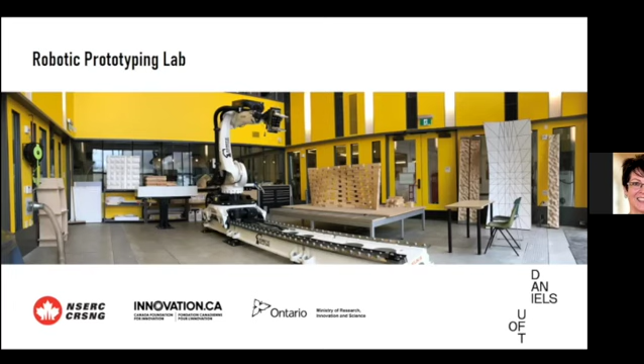So this is where I work normally in non-pandemic times. This is the John H. Daniels Faculty of Architecture, Landscape, and Design. We moved into this building actually relatively recently in 2017. The building was originally built in 1875 as the home of Knox College. You can see the original building in front, and in the back is the new addition. In that new addition, I also have my lab. So this is the robotic prototyping lab where I do some of my research.

My research, while it encompasses digital fabrication, robotics, and construction, right now is really primarily at the intersection of sound and architecture. We'll see some more evidence of that with some of the projects I'm going to show. I did my PhD research in Copenhagen, at the Royal Danish Academy of Fine Arts, an arts institute, but I worked at the Center for Information Technology and Architecture, a highly digital and technical group. Prior to that, I was an associate partner with the research and development group of the major international architecture practice, Foster & Partners.

While at Foster & Partners, I had the good fortune of not only working with some amazingly talented people, but also working on projects that actually got built. So this is the Kogod Courtyard in Washington, DC, Lime Street Office Tower in London, and the Thomas Deacon Academy in Peterborough in the UK.

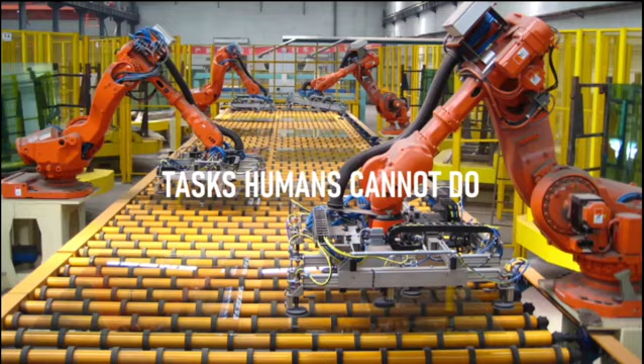So the topic of my talk today is about robots, and you've probably come here to hear about robots. So what about robots? It's an oft-quoted explanation and/or excuse for the adoption of robotics that they will do tasks that are dull, dirty, and dangerous. This certainly presents some noble seeming reasoning. Robots can replace human workers in jobs that could be harmful to human health, thereby moving human jobs to safer, cleaner, and more interesting work. Robots can do tasks that humans cannot do or cannot do easily — for instance, picking up these large panes of float glass.

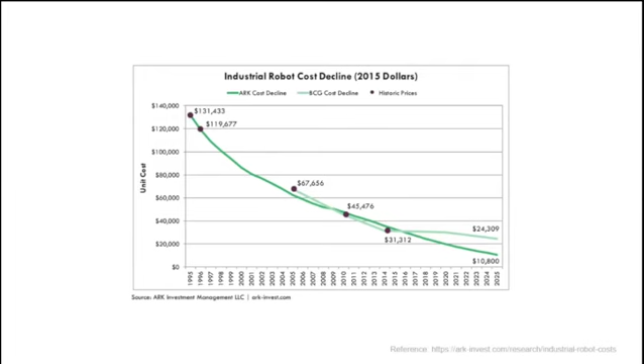Worldwide, the cost of robots is going down and the number of robots is increasing. With $26.9 billion in global shipments in 2015, this is expected to increase to $67.9 billion in 2025. So the benefits of robots are many. They can do repetitive tasks, they don't get tired, they can work 24 hours a day, they're strong, they're fast, they're precise, they're not concerned with danger, they create new markets and value networks, and they're inexpensive, relatively, and widely available. So, what about the building industry?

Where are the robots? It is certainly not for a lack of dull, dirty, and dangerous jobs. Construction has lagged behind other sectors in the adoption of robotic technology.

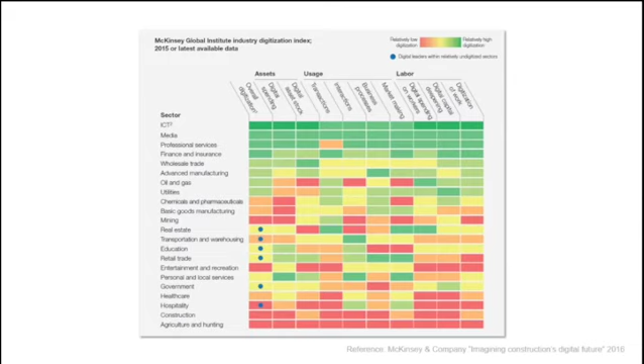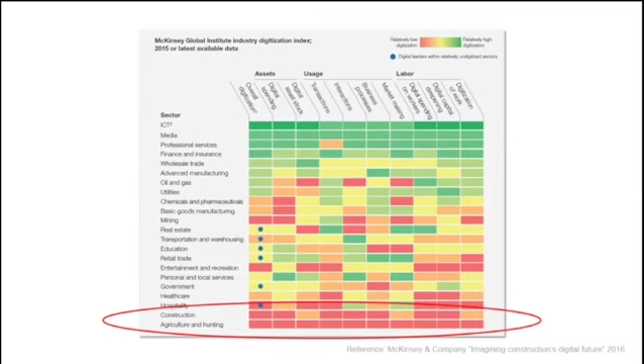In 2016, McKinsey Global Institute studied the use of digital technology in a variety of industry sectors, and unfortunately, construction did not rank very highly. In fact, the amount of digitization in construction rates right above agriculture and hunting, right at the bottom. Additionally, we can see that labor productivity in construction has not kept pace with the general productivity increases when compared to the labor market as a whole.

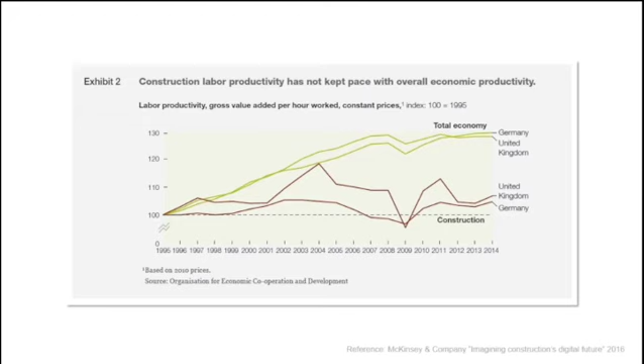So we can see that there's room for improvement here. Robots certainly mean the adoption of more digital practices, and this could therefore also mean potentially an increase in productivity. But what about architecture?

While related to construction and the production of buildings, architecture is fundamentally concerned with design. And so what do robots have to do with architecture?

The definition of what it means to be an architect is linked to our design tools. As Jonathan Hill has pointed out, it was the invention of drawing that enabled the creation of the architect. The architect is defined by the ability to draw, and the drawing to conceive of and communicate the plans for a building at a remove, both spatially and temporally, from the construction site. And this has been the way for 1,000 years or more.

I would argue that it is no small matter that the design tools of the architect have changed. And it also makes sense of the reluctance of the architect to adopt entirely new tools, as their whole definition of their discipline is based on this, right?

Ivan Sutherland introduced the world to the first CAD system in 1963, Sketchpad. This system could draw, it had parametric capabilities, it could do simulations and calculate structural performance, it could link geometric designs to numeric databases. Ivan Sutherland recognized that the computer offers considerable potentials that are different and greater than the drafting board. Using computation was not just another way to draw, but a new way of thinking.

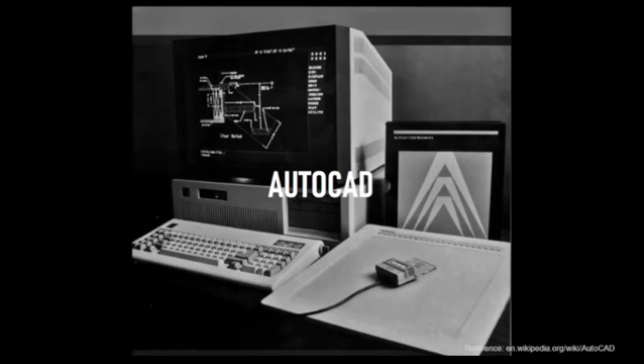AutoCAD version 1 was released in 1982, and by 1986, AutoCAD had become the world's best-selling CAD software. However, the potentials that Ivan Sutherland had identified had not been realized, as AutoCAD was essentially just a two-dimensional drafting board. Robert Aish writes that in retrospect, 2D drafting is really a travesty of Sutherland's original intentions, and the spectacular flaw of 2D drafting is that it fails to harness the potentials of the computer as a creative design tool.

In 2001, I finished my master's in architecture degree and moved to London, England from Canada to find work and begin my career as an architect. I ended up getting a job at an engineering firm, Buro Happold, one of the world's leading structural engineering firms, working for the Structures Group in London.

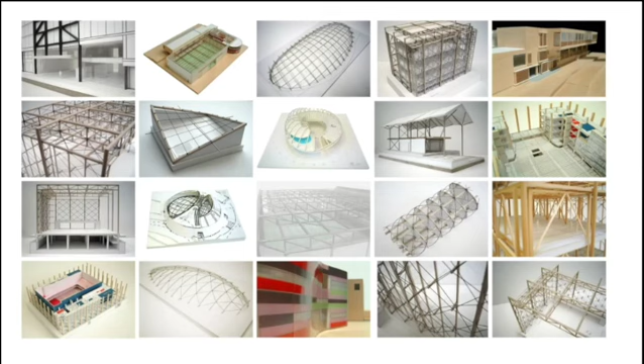Here I had the chance to work as a physical model maker, building a whole range of different types of physical models and doing a whole range of different types of drawings as well, in service of both the making of those models, but also communicating engineering concepts and performance concepts to the clients, which in this case were architects.

In the course of doing this, I also began to use digital technology more and more. At first to build better physical models, but eventually this just overtook what I did, and all the models that I built eventually became done in the computer.

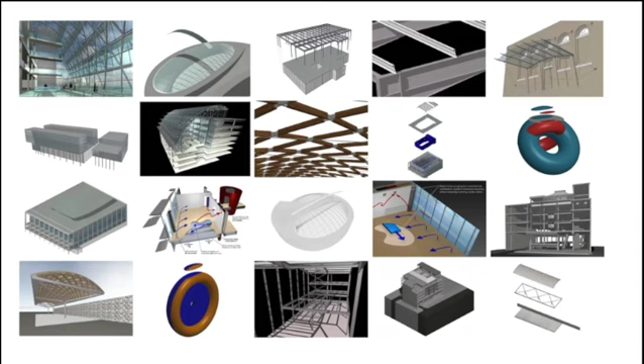So what I did was basically take this radial section through it, bring it down to the ground, and create these structural sections around this more amorphous form to create this physical model. So this move from the digital to the physical. However, as the design developed and as iterations happened, it became very hard to keep up with this. So I figured there had to be a better way, right?

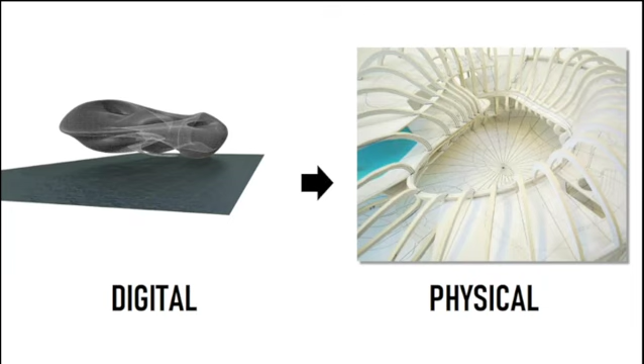That would automatically update our design intentions to describe these designs in terms of relationships, rather than having to remodel this geometry over and over again.

Around 2003, I attended the first Smart Geometry conference in Cambridge and had the opportunity to see Hugh Whitehead speak. If you recall the first slide I showed with the London skyline, the Swiss Re office tower, locally known as the Gherkin, features prominently. This building was going up at the time I was living there and working at Buro Happold.

This building was obviously very important to my experience of London. Seeing Hugh present on this project was important enough, but then for him to also explain this new design tool he was creating at Foster & Partners, able to explore the design potentials of this project as well as automate tasks like updating drawings, was really the answer I was looking for in terms of my own practice.

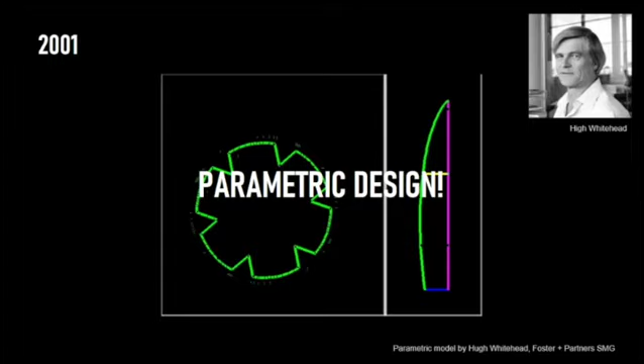So I thought, I have to go work for this guy. At that point I made contact with Foster & Partners, and I was fortunate enough to move from Buro Happold to Foster & Partners and join Hugh Whitehead and his team in the research and development part of Foster & Partners.

You can see here on the animation, the parametric model and the creation of these automatic floor plates. This was the state of the art at the time in architectural digital technology. This was the first project I worked on, which was a second stage competition for this large 1.5 km long canopy.

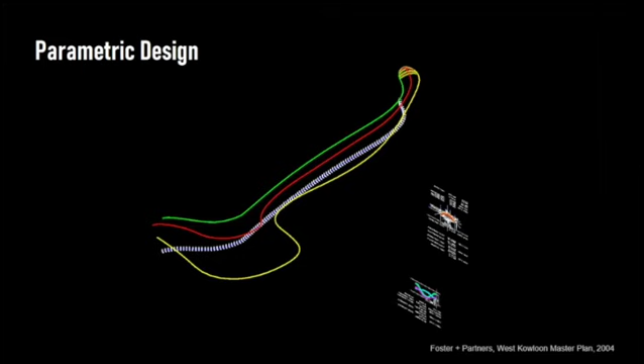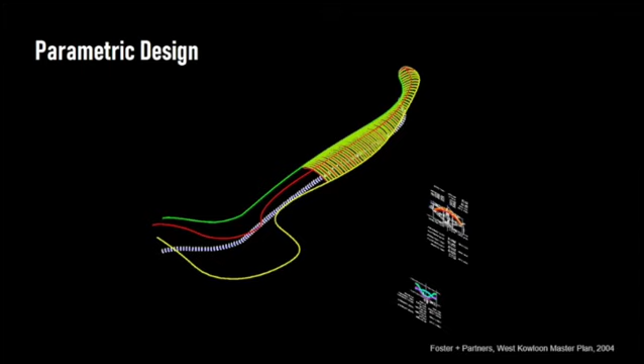I adopted these tools that Hugh was developing with Francis Aish. You can see here the parametric model and how I was placing these parametric sections, which were then creating the top and bottom surfaces for this giant roof.

But the problem was, once you broke it down to the actual elements we wanted to create, there ended up being hundreds of thousands of elements. The problem was that the parametric system didn't scale. So how were we going to scale up this parametric system? We needed to invent some new tools—again, inventing more digital tools for this project. This is where I found computer programming, i.e. scripting, which enabled me to create the huge amounts of elements that were necessary for this.

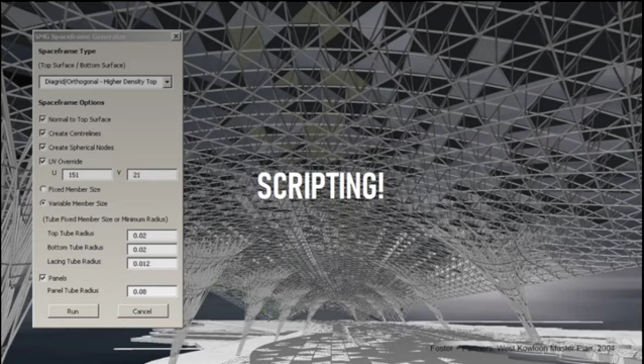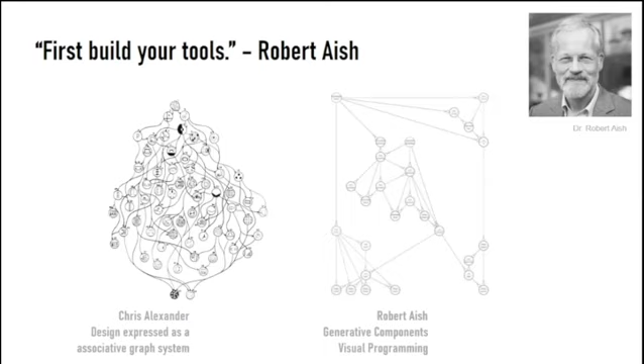Robert adopted a lot of ideas, not only from practice from people like Hugh Whitehead, but also from a legacy of computational thinkers such as Christopher Alexander, who had imagined design as an associative system using formal graph methods. Robert basically turned these ideas into software, so using visual programming through connecting design concepts, one can actually come up with architecture.

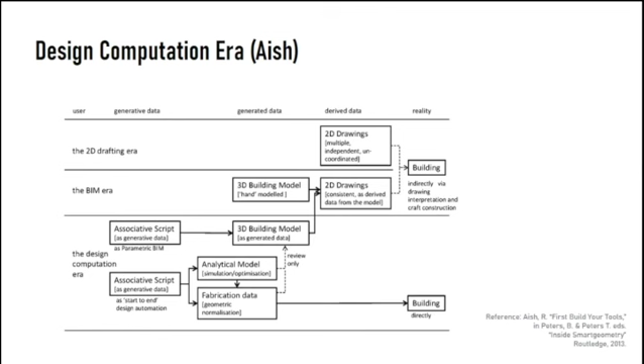Therefore, trying to enable some of these ideas that Ivan Sutherland introduced with Sketchpad, that CAD is not a better way to draw, but a deeper way to think. Robert likes to think that we're entering into this design computation era—or maybe this is wishful thinking—where the designer is no longer directly modeling the building. Instead, he's developing an algorithm whose execution then generates the building.

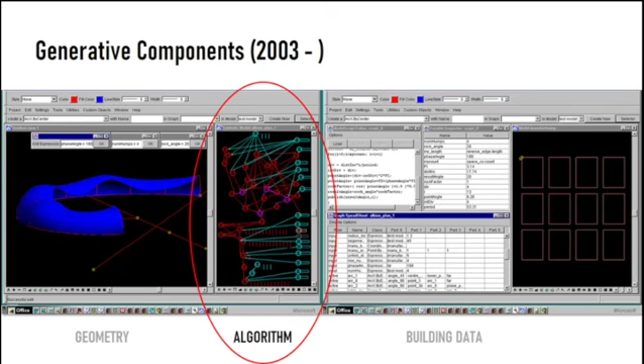So this is the software we were working with at the time, along with other softwares as well—Generative Components, where there's an algorithm expressed as a graph, which can produce both the geometry of the building as well as a variety of different building data. There were two different approaches we were using: associative modeling and computer programming and scripting, and Generative Components actually had both.

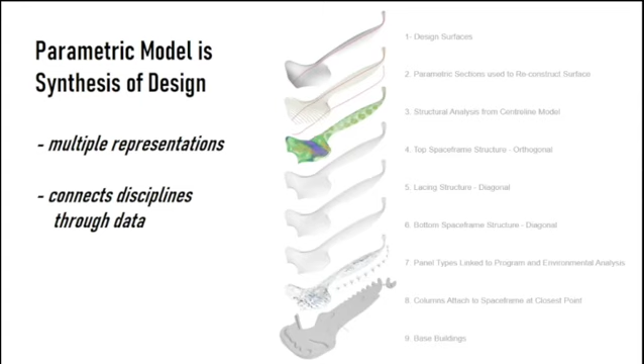What we were finding in these projects is that the parametric model was not only adjustable and able to create really cool forms, but it enabled multiple representations of data. What do I mean by that? It's not just the architectural drawing, but we could also include things like cost, structural performance, or environmental performance. We were able to connect different disciplines through this data we were developing.

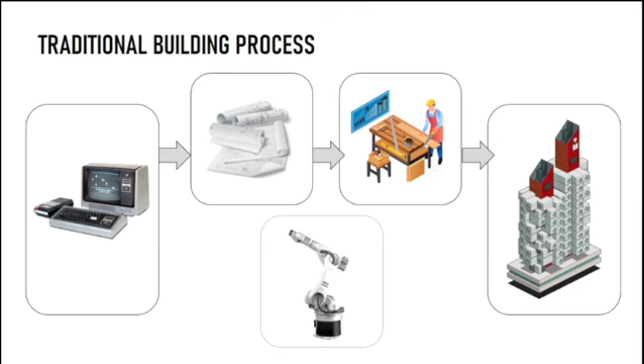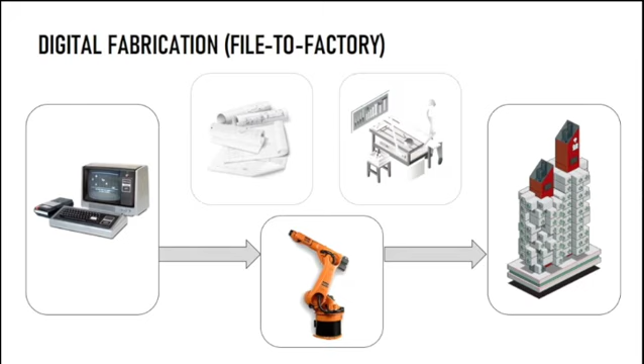So with this data, we began to experiment with digital fabrication. In the traditional building process, we go from the drawing on the computer to the production of physical drawings, which are then given to the craftsman who builds the building. With digital fabrication, we can go directly from the computer to create digital instructions which will then create the building. This is a cool idea, especially for those of us working with digital technology and architecture, so we were very quick to adopt this technology.

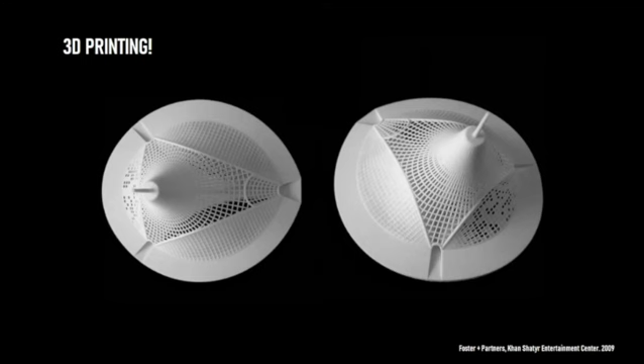We had the first 3D printer in a UK architecture office, which was one of the first projects I worked on. We were looking at complex, form-found geometries, and I was able to instantly 3D print these options, which was amazing. We were able to produce hundreds of different iterations, not hundreds daily, but certainly multiple iterations daily. This became a really key part of this project's development.

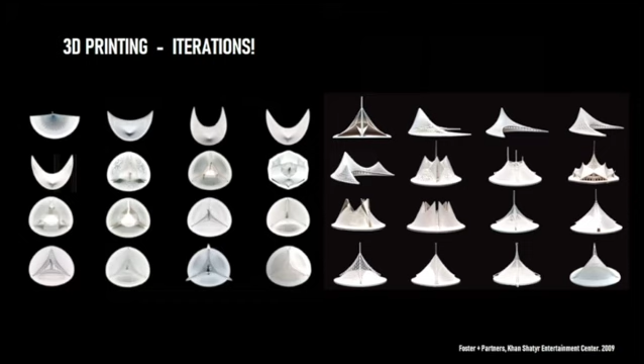As Hugh Whitehead said, the use of rapid prototyping closes the loop in a digital design process, and it's a recognition that key design decisions are still made from the study of physical models. This building here is the built project - the Khan Shatyr Entertainment Center in Kazakhstan.

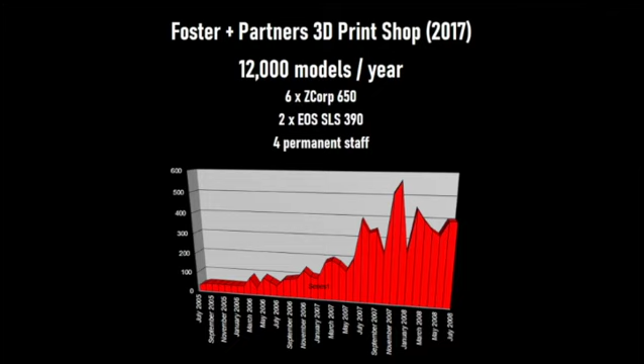So what we found is that from 2005, when we got the first 3D printer, 12 years later the Foster and Partners print shop is producing 12,000 models a year - a huge number of 3D prints. So massively successful at that particular architecture firm.

Why is 3D printing so successful? Architects were already working in 3D, so they already have the data - it doesn't require much more work to get it, okay maybe a bit more work. It's faster than hand building. And the cost - even though it costs a lot to 3D print, it costs more to pay an architectural assistant to build that model by hand. Also, the limitations of construction disappear, which arguably could be a good or a bad thing.

In smart geometry, we also noticed this shift from software development to fabrication. The first 6 years of smart geometry were really focused on developing parametric tools, computational tools for architecture, which didn't really exist for architects at the time. There were tools for engineers and mechanical design, but not really for architecture. So the first 6 years were developing these tools. Once the tools had been developed, it was like, what can we do with them? And digital fabrication became a key part of that.

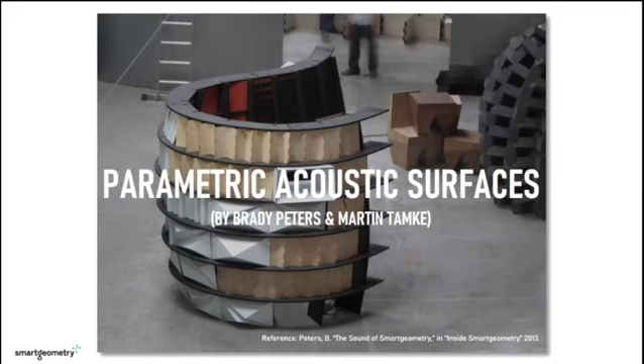This is the smart geometry workshop in Copenhagen, Denmark, where a lot of this research happened. I worked on a project there called Parametric Acoustic Surfaces, where we used digital fabrication - laser cutters, CNC machines, etc. - to create this performance-driven acoustic architecture.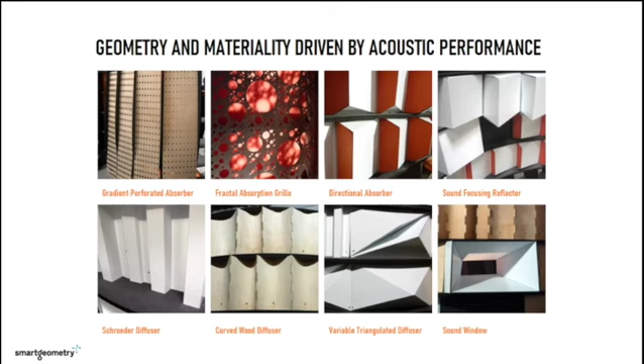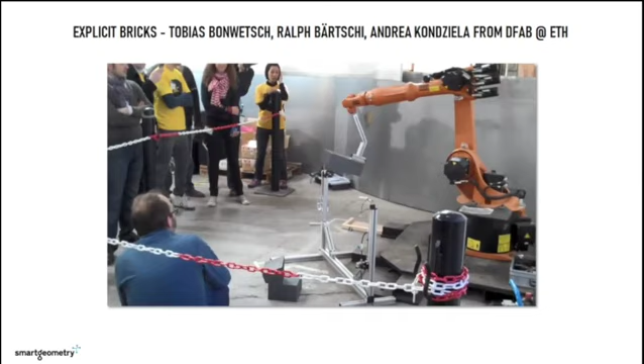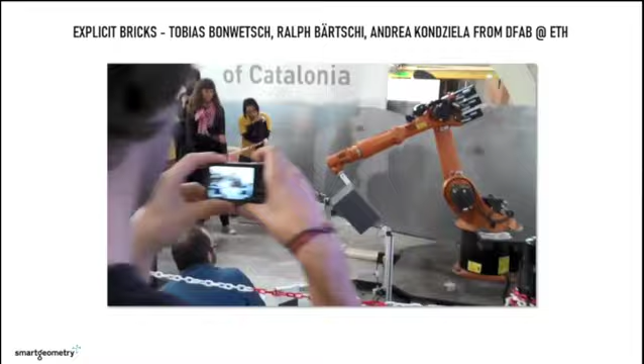But what I want to talk about is this project done by Tobias Bonwetsch and Ralph Bärtschi, particularly from the DFAB group run by Gramazio and Kohler at ETH Zurich. They ran a workshop called Explicit Bricks, where they brought a robot to the workshop. Through programming subtractive geometric processes using a hot wire cutter, they were able to create these bespoke formed bricks, which could then be stacked in very interesting ways.

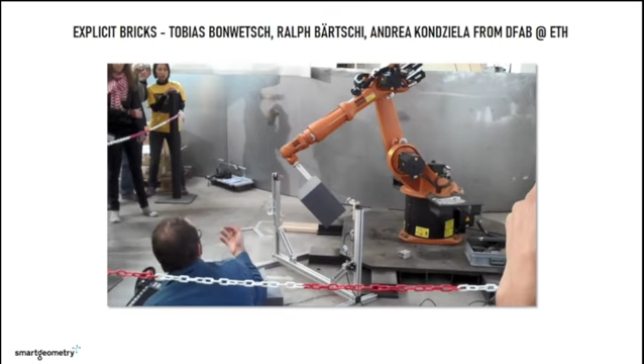This really was very revolutionary to us as architects, especially coming from 3D printing, which we weren't imagining would scale well to architecture. But we were thinking, wow, this is something that could scale to actually create real buildings.

Again, similarly to before, we have the algorithm which can create this digital model, but it can also directly send the fabrication instructions to the robot. Gramazio and Kohler had achieved success using this approach at the time, and they should really be credited with this initial research into robots in architecture, investigating the potential of this technology for application in architecture.

Traditionally, the promise of industrial robots has been that they would replace the human workforce. But these projects, led by the Swiss Federal Institute of Technology in Zurich, demonstrate a different result. Architects are free to create designs and patterns of a precision that simply could not be achieved by hand.

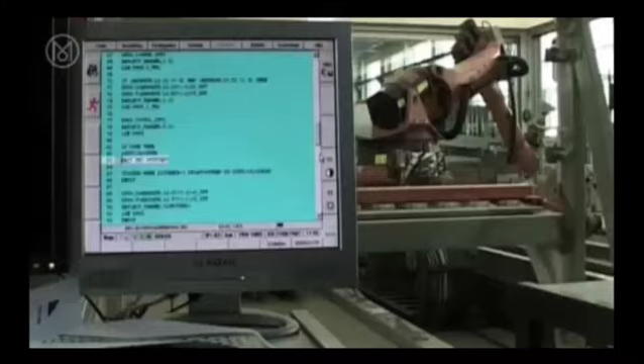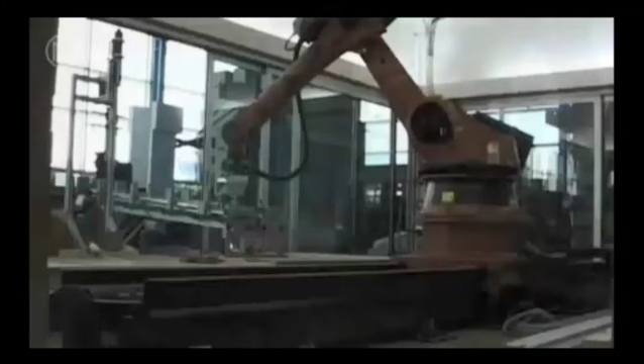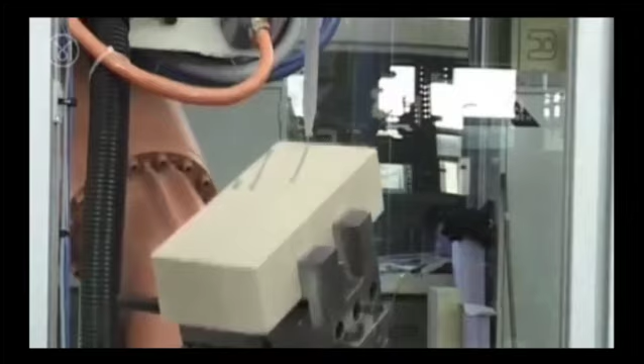The industry is very interested, but you have to show them that they will have the possibility to address the market with new products that didn't exist, and that they wouldn't have if they wouldn't invest in innovation. This is the point, the whole point. And I think every part of the construction industry could engage in such a process. Now we started with brick industry. What will happen if all buildings will be done by robots to the labor in construction industry? And we had a lot of success because of our products, prototypes we are doing right now, to show to people that have this question that it's not about the substitution of labor, it's about new products.

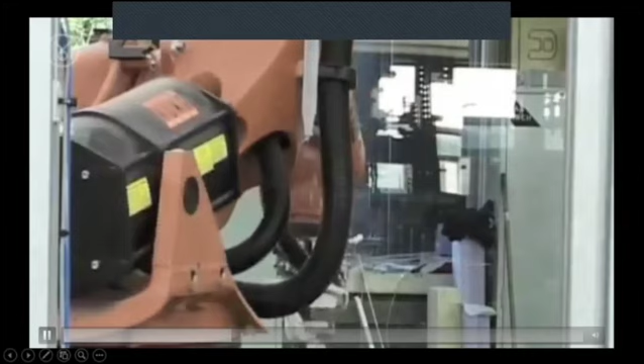So we are not doing the same thing just with robots. There are a lot of works, of jobs, of things that are very, very difficult for robots to do, and we will never automate. A human is much more efficient with his intelligence and so on. And there are other things you can do with robots. You can do very well with robots, with machines, and those processes generate new products.

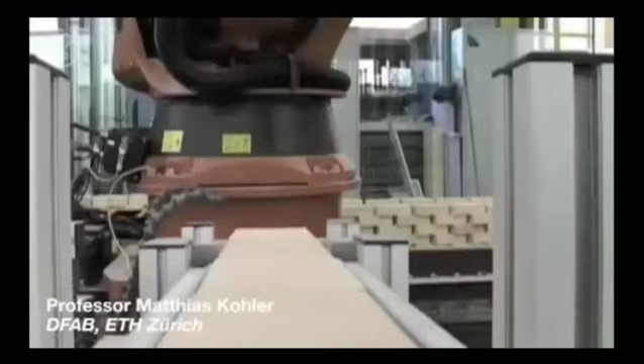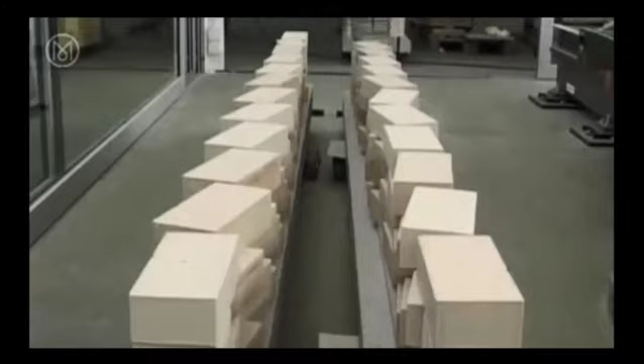The construction industry is very open to these changes because they see that from the architect's side of view that the demand for customization is constantly growing. Yet their possibility to react to this is currently very low because with the standard techniques there's a lot of development always to be done.

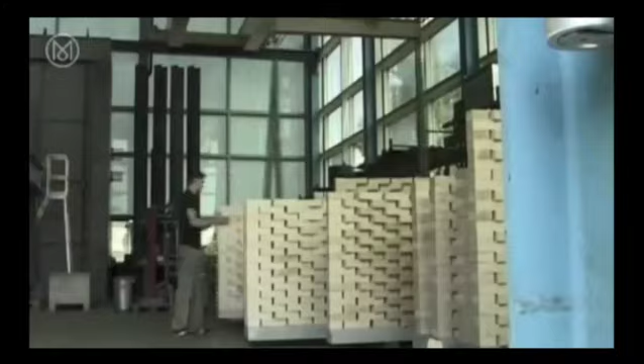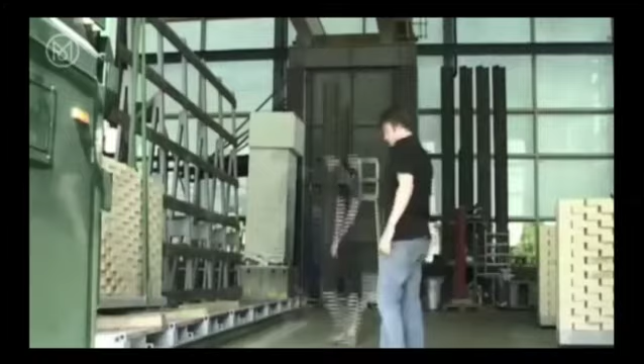Now with flexible manufacturing and digital fabrication, there's the possibility to standardize new products which are in fact mass customizable. You could imagine that products are no longer conceived just as fixed products which are then repetitively used, but that they are more complex, they have more capabilities and functionalities integrated into them, which are then custom produced by possibly small manufacturers, which can integrate all this information into a building part or an architecture.

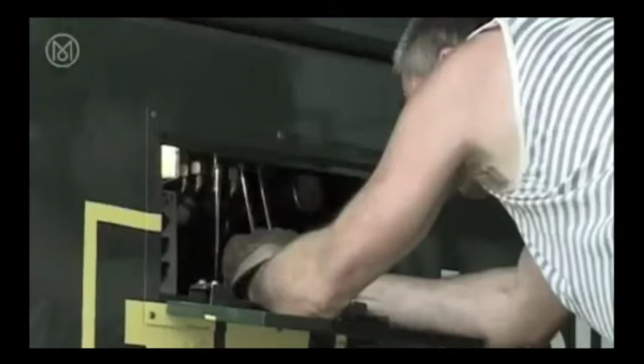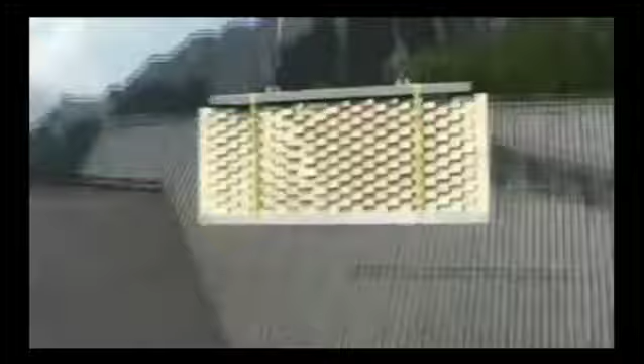We expect that the robot can be used right now for the construction industry. I mean, we were lucky to already build a facade with the robot, which was actually 4 months after the first brick was really laid by this robot. The first architectural product was already produced in collaboration with an industry partner, and our industry partner Keller Brickworks from Switzerland is interested in actually bringing out the product which actually uses this technology.

The ultimate goal for us is to enlarge the possibilities for architecture and to create direct links between the physical becoming of architecture and the information side of architecture, which developed rapidly in the 1990s. This gives new possibilities for new designs, for new architectures.

So what we can see from this wonderful project, one of the early projects from Gramazio Kohler, and what they explain is that for them, robots were not about the substitution of labor. They were in fact about these new processes, new construction processes and design processes that would then result in new products and this mass customization of architecture, enabling architecture to be customized for clients for different situations. And also key to this is this linking of digital information to physical making.

Another point that I want to bring up right now is this rise in building performance and performance-driven design in architecture as well. So I wrote this book, I guess it came out in 2017 or 2018, called Computing the Environment. My wife and I wrote this. We looked at and interviewed people that we knew that worked at a lot of major design firms across the world, architects, engineers, etc.

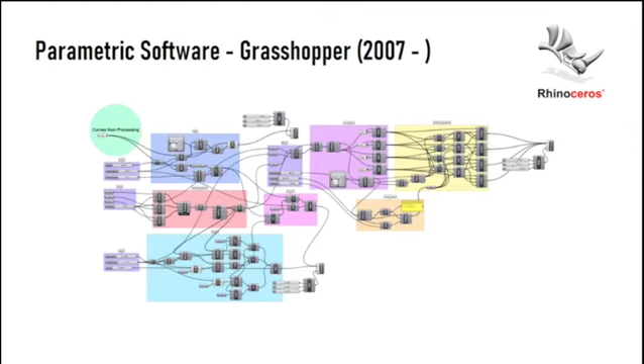And the conclusion that we came to is that architects are really moving beyond parametric design, and they're moving into this idea of building performance. One of the things that's enabling this, certainly not solely, is this idea of software development using these relatively easy to use visual programming tools, particularly Grasshopper. What's amazing about the Grasshopper platform is that it's easy to create your own tools within that. They give instructions about how to create your own plugins to this environment. So what's happening is we're getting this whole ecosystem of new design tools that are able to plug in to Grasshopper, which plugs into Rhino, which is a CAD software.

We're getting all these new softwares that can simulate performance in different ways: energy performance, lighting performance, acoustic performance, et cetera. Phil Bernstein, one of the leaders at Autodesk for many years, writes that where the architectural design process in the pre-digital age was one of careful contemplation, limited calculation, experienced intuition, and ultimately judgment, today's designer can rely on an array of analytical, simulative, and visualization tools that enhance understanding of an emergent design and predict its ultimate performance.

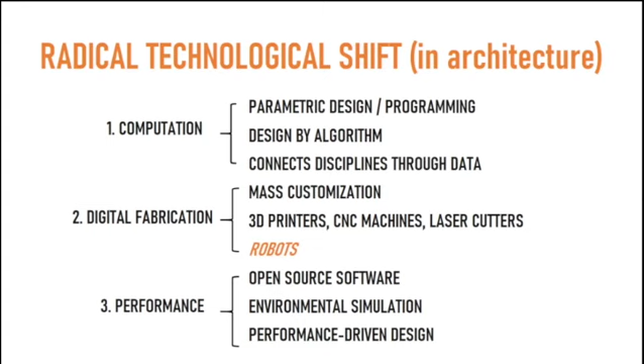So the point I'm making here is that we're seeing this radical technological shift in architecture, I think, because of design technology. Number one, through computation. Number two, through digital fabrication. And number three, in consideration of building performance.

So why are we doing this? Is this for money? Given the salaries of architects that I know, I would say not. Are we doing this for the thrill of invention or for the sake of technology, to push the envelope and take technology as far as it wants to go? And while robots are thrilling, I would argue no.

It seems, given current evidence, that the quest to maximize profit and unhindered technological development has led us here. Edward Burtynsky, the photographer, in his show recently at the AGO, paints a portrait of the world as it is, a world that humans have made. Titled The Anthropocene, humans now affect the earth and its processes more than all other natural forces combined. And while Burtynsky's images have incredible beauty, it does not necessarily paint a picture of a world we want to live in. So we need to change, and maybe robots can help.

So let us return to robots for a minute. Tesla Motors has recently been criticized that they have over-roboticized; there's need to reintroduce humans. And while robots can be programmed to do repetitive tasks and tasks requiring great strength, somehow they fall down when it comes to tasks requiring decision-making and fine motor skills. Getting a robot to clear tables in a busy restaurant would be nearly impossible, and even opening doors and using power tools is beyond the most advanced robots.

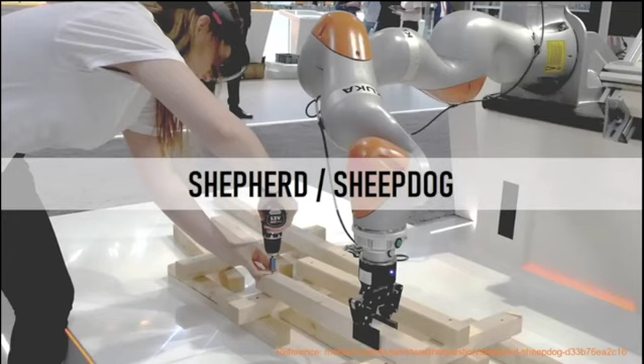Dan Hill warns us that we should not unthinkingly deploy robotics in place of human labor just because we can. Equally, we should not continue to use people as robots. We need to start sketching out positive relationships between people and robot, assessing who does what. Dan Hill proposes a model of shepherd-sheepdog, and I think this model has the potential for particular application in construction robotics. In this framework, the human is the shepherd to the robot's sheepdog.

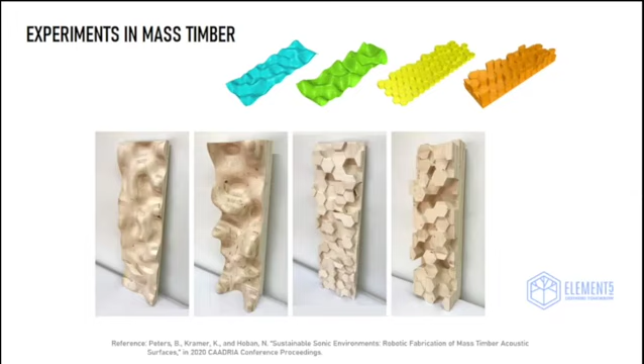So all three of these projects lie at the intersection between these ideas I've been talking about: algorithmic design, robotic fabrication, and building performance. The first project, Sustainable Sonic Environments, is a project that I did with a bunch of research assistants. It started out as a series of experiments we did collaborating with Element 5, creating some acoustic diffuser panels out of cross-laminated timber products, seeing how these types of performance could be embedded within those materials.

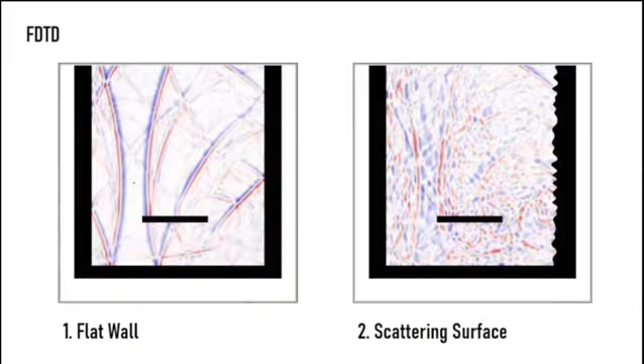Here we were looking at the acoustics of meeting rooms and looking at this particular phenomenon of flutter echoes. You can see on the left-hand side this sort of distinct reflections that can form in between parallel walls, whereas on the right there's a more diffuse sound field, which has less of these sort of distinct flutter echoes. So we came up with this concept of a wall that would have this sort of continuous surface, which would then become a little bit more modulated in the middle.

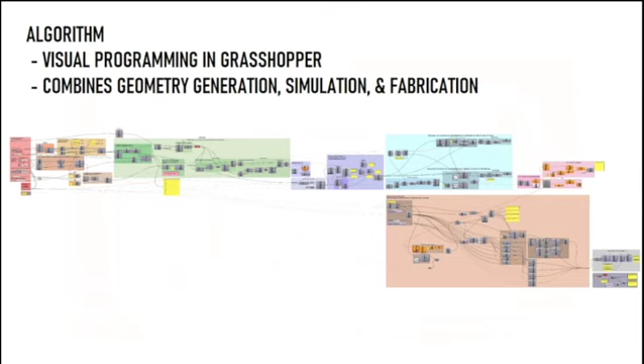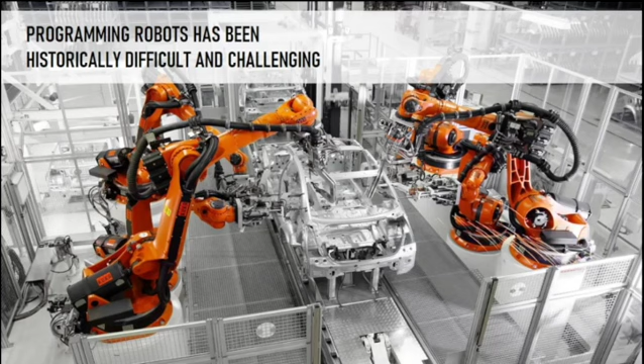However, programming robots has been historically difficult and challenging. This is justified in the case of the car assembly line, as tens of thousands of cars are produced for each one of these programs that you have to program the robot for. However, when you produce a building or a building experiment, there's only one of them. So how do you program the robot? What's going on?

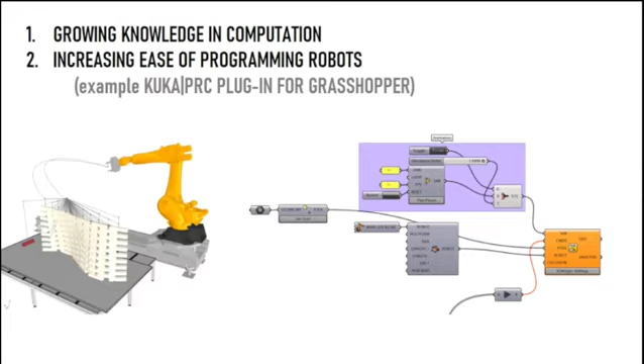So here's our 3D model. This is a picture of our robot, or a video of our robot doing the milling of this wall. A little picture of the lab too.

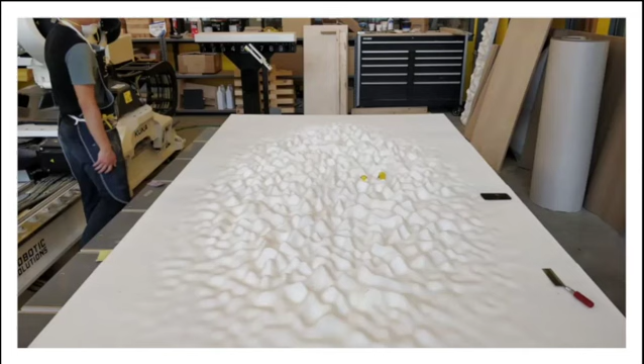We've seen that this surface has measured acoustic benefits, but it also provides a visual impression and invites the room occupant to rediscover the wall surface as something to touch, to feel, and to engage with. It reimagines the ubiquitous plasterboard as a customizable surface that can improve the acoustic and visual comfort of the inhabitant.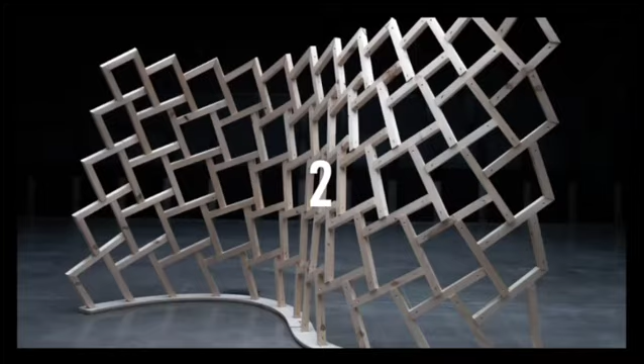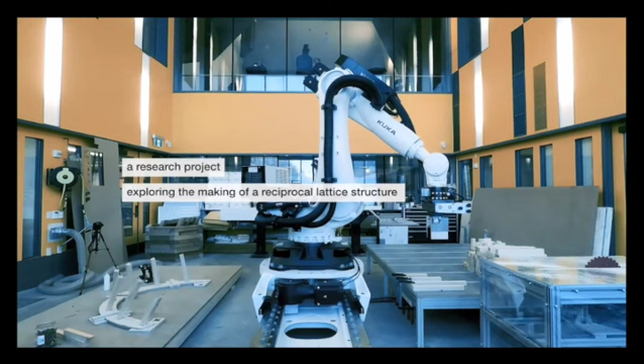The second project here is Spatial Timber, where we look to understand the rules that go with a reciprocal frame project and then apply this to a more flexible three-dimensional surface.

For this project, not only do we have to program the robot and all of its moves, but part of robotic fabrication is also the creation of these customized end effectors. We can see here a customized gripper that we made that fits onto the robot, as well as this customized saw table, which is able to cut these bits of structure to the right dimensions that we need.

So this is, I guess, not only cutting them, but it's going to place it as well here. This is one of the parts of robotic fabrication that we have to address as well.

It's not only just the creation of the design, the algorithm, and the instructions which are sent to the robot, but there's also the design of the whole fabrication system, the creation of the end effectors for the robot, which in a sense can be seen as extra work, but also illustrates the ultimate flexibility of the industrial robot. You're able to put pretty much any end effector onto the end of this robot, which enables it to do almost an infinite amount of things.

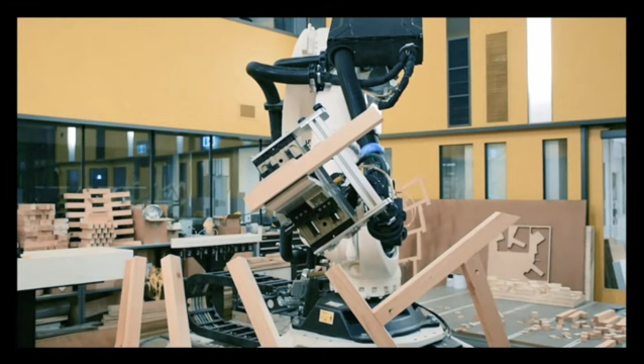So you can see here the robot is placing this piece of the reciprocal frame precisely into the correct spot.

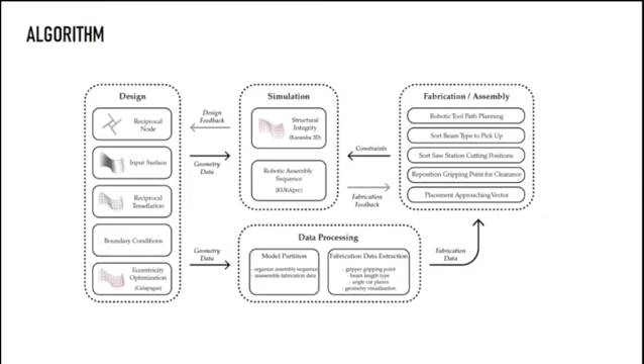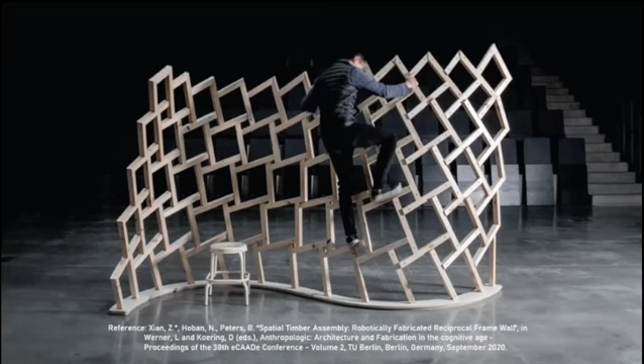Here's the algorithm, which includes not only design and fabrication, but also the structural simulation. This is the Grasshopper script here. Then there's this design of the fabrication process, the placement of all these pick points, lifting points, cutting points, and placing points, and an image of our final experiment here.

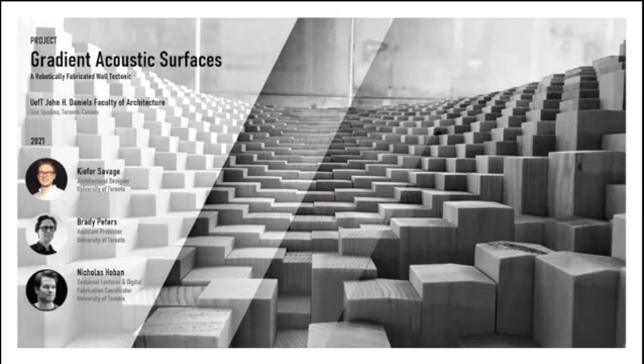The third and last project I'm going to talk about is the gradient acoustic surfaces, where we're looking at this robotically fabricated wall tectonic. We were experimenting with stacking techniques in robots and wondering how we could use these for acoustic performance.

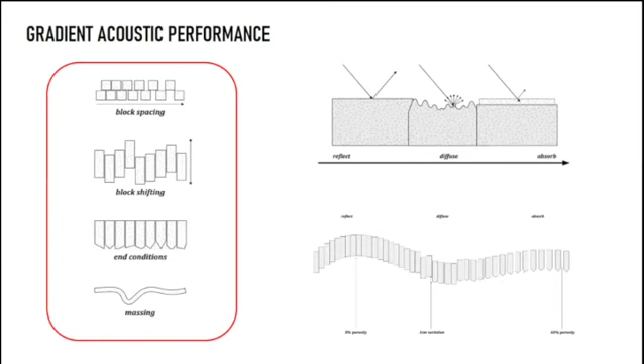When an acoustic wave hits an architectural surface, one of three things can happen: it can either be reflected in a specular manner, or it can be diffused, scattered into many directions, or that sound energy can be absorbed. So what we sought to do was essentially create a series of strategies using these blocks that would create all three of these different acoustic performances.

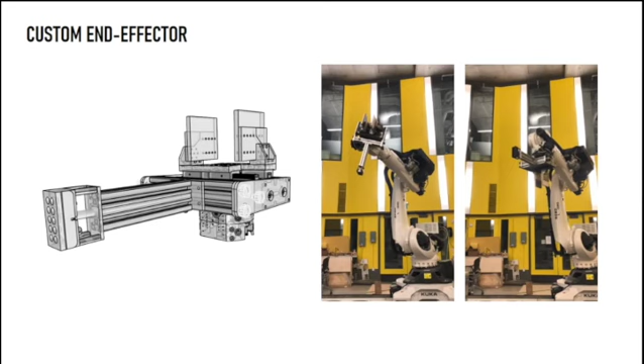So here we see reflecting surfaces, scattering surfaces, absorbing surfaces, and we combine these into one single surface that we would be able to design. Again, here's the algorithm, which contains all of the different design, simulation, and fabrication steps. This is the dual gripper end effector, which we designed for this project.

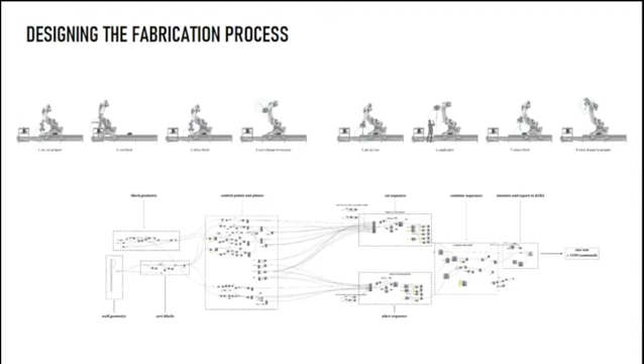Then we use this computer-controlled saw. Again, the design of the fabrication process. And here's a video, a sort of time-lapse video, showing the robot constructing this.

I talked about Dan Hill and this sort of shepherd sheepdog idea. This is really what we're doing here, as well as working with the robot to help it build the wall.

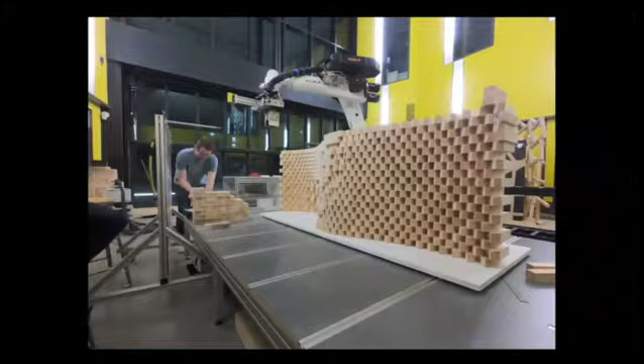This happened over a couple of days, as you can see by the lighting in the outside background. We were running the robot at a much slower speed, this being the first time we're running it. If this was actually done in some commercial application, you could speed up these processes a lot.

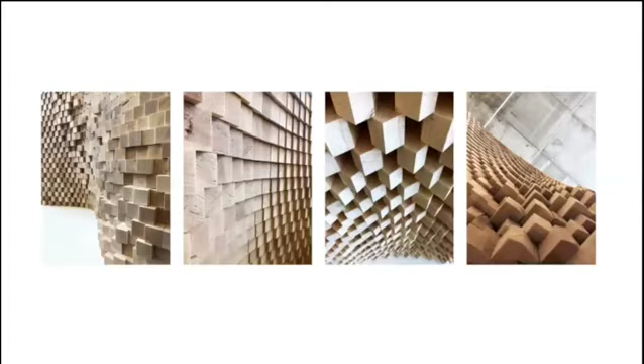I research and practice within the computational design community in architecture. Within our conferences, journals, and events over the last 10 years, we've seen an incredible shift of attention towards the potentials of robotic fabrication. Architects are captivated by robots. As this recent book blatantly states, even when they do nothing, robots are evocative. I believe that this newfound interest in robots by architects lies in more interesting narratives, narratives that relate to the changing nature of practice, and architects' role in practice, and I hope I have illustrated a few examples of that here today.

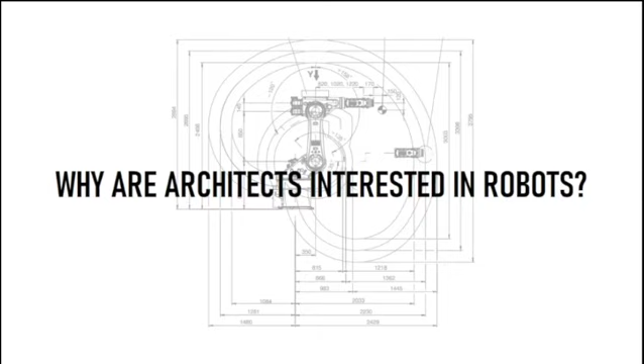So why are architects interested in robots? Is it because they make beautiful things? Perhaps, and perhaps this has something to do with it, but I believe that it goes beyond form. I think it really has something more to do, or not everything. I'm not proposing that this is the answer, but this is part of the answer: design and fabrication through robotics enables the creation of building tectonics that are responsive, not only to design intention, but also to performance, materiality, and assembly processes.

So for architects, robots are not about productivity, it's not about profit, and it's not about dirty, dull, or dangerous work. So if computation can help us design a better world, maybe robots can help us build a better world. Thank you very much.